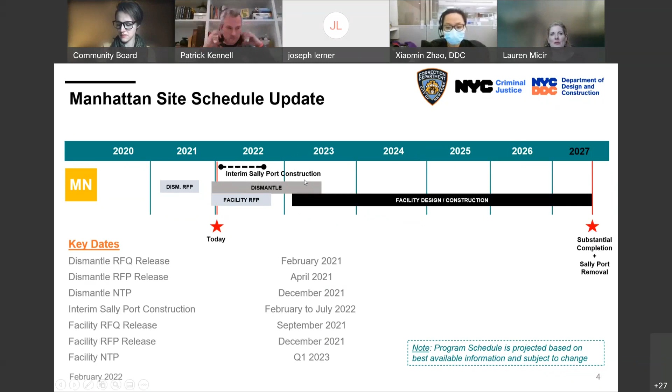I want to make it clear to everyone: the team here tonight is the design build team that has the contract for the interim Sallyport construction and the dismantle of the existing facility. A separate team will be onboarded in 2023 to do the design and construction of the new facility, which has not yet been designed. The interim Sallyport starting construction this month will finish construction by July 2022, but that facility will remain in place until substantial completion of the new facility in 2027, at which point the interim Sallyport will also be taken down and dismantled.

So during all of this, there are a variety of resources for the community. This is a quick snapshot of past engagement that we have done. Most recently, we did a couple of presentations in December of last year.

We presented to this committee and gave an initial presentation on the Sallyport design. We received a lot of feedback during that meeting, which was part of a preliminary PDC submission. PDC also heard about the community's feedback and responded back to our team asking for some design changes and updates.

So we are here tonight to show the community the revised design and what changes we have made in response to all of that feedback before resubmitting to PDC on the 18th of this month. We also presented about the artwork removal and storage and the Percent for Art program in December.

And then throughout January, as the design build team has kicked off, we've had a number of briefings, first with Councilmember Marte, also with the borough president, and then we were recently at the Quality of Life Committee to walk everyone through the full dismantle process and what to expect during dismantlement, in addition to some brief updates on the Sallyport. We also held a briefing with stakeholders in Chinatown on the 26th of January.

Upcoming meetings: we are going to be on the agenda for the CB1 Executive Committee on the 17th of February. That is in response to a number of questions we've received on some technical information and planning for dismantlement and environmental questions. That presentation is going to be focused on those environmental issues and the information we can share about those topics.

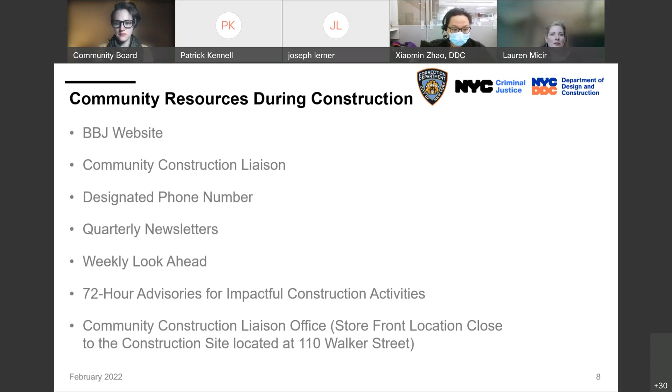She will have a storefront and office space located at 110 Walker Street, just a block from the site. We expect that to begin being open on the 15th of this month. There's a conference room that'll still be getting built out and will open another week or two after that, but we do expect her to be on site and available on the 15th.

This is a quick snapshot of our website. I mentioned there's a lot of information that the community can find here: updates on project timeline, all the notifications that we issue get posted here, and NAC presentations and other community engagement updates also get posted.

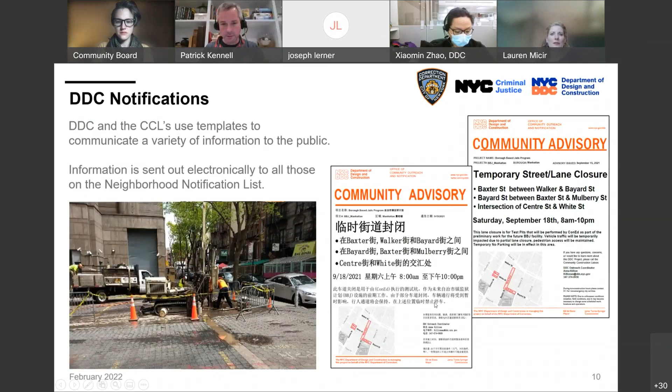This is a snapshot of those advisories that go out to the community in advance of impactful construction activities. These are the 72-hour notices that get posted.

And this is Pauline Chan. Some of you have already probably seen her and met her. She's been going around the neighborhood, sharing these advisories, sharing her project information card, and just getting to know the community. So she's a great resource for everybody.

And with that, I'm going to turn it over to Richard, I think you're going first, to give a quick overview about the overall dismantle process.

Hi, good evening everybody, how are you? My name is Rich Peterson. I am the project manager for the dismantlement design build, and I'll walk you through the dismantlement process that we're getting ready to get started.

So right now, we are in February. We are getting ready to set up for the interim Sallyport to start construction. We have been working inside of the building doing our site assessment and surveys for the past month in order to develop our dismantlement means and methods for the DOB.

About mid this month, we will be going on site to start setting up our construction fencing. We are setting up the field offices and we'll begin to have a presence on the site. By the end of the month, we hope to start the artwork removal and prep for storage. And then around May, you will start to see scaffolding be erected on the buildings and prep for full dismantlement come summertime.

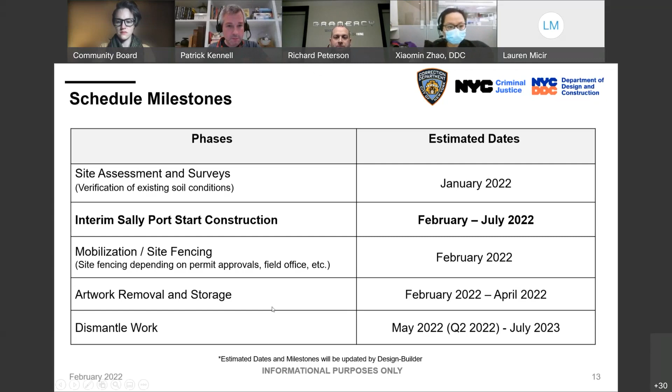And now I'll walk you through a quick animation showing the intended procedures that we plan to use to take down the two structures. So here we are looking southbound. You have Chung Pak to the north tower, and then the south tower.

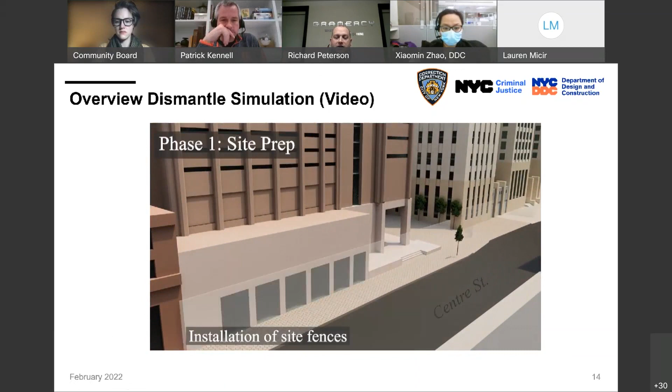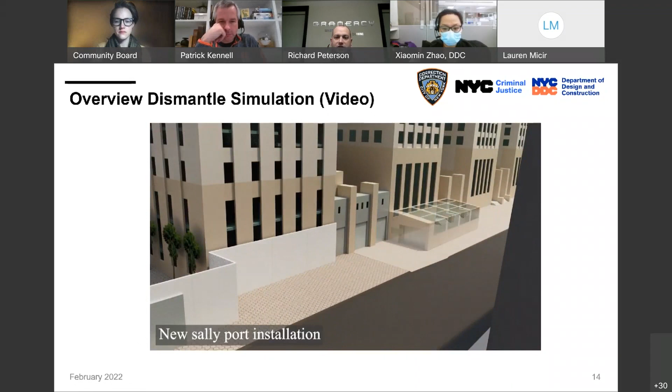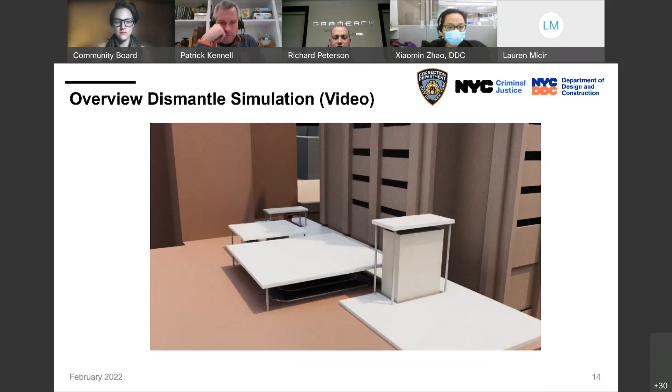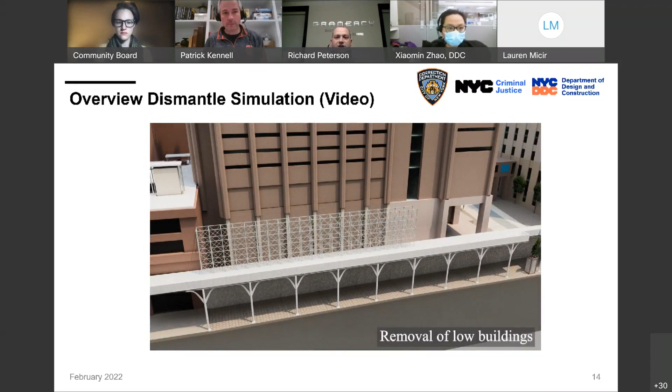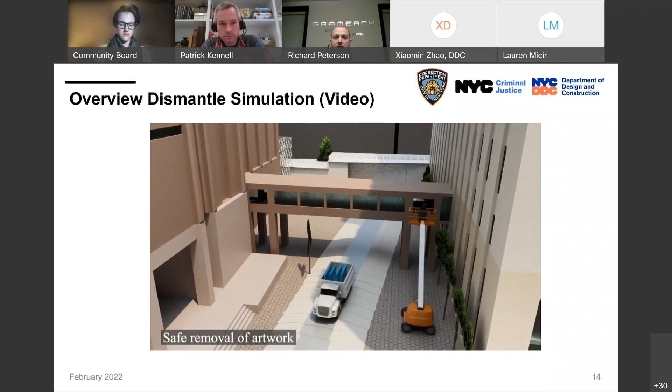You'll be installing roof protection over the Walker Street property, which is Chung Pak, over their skylights and rooftop equipment. Sidewalk bridging and scaffolding will be erected on the job site. As you can see here, the scaffold is not your typical sidewalk shed, it is the Urban Umbrella shedding, which allows for no cross bracing at the area of pedestrian traffic. So it's open, airy, and a brightly lit sidewalk shed.

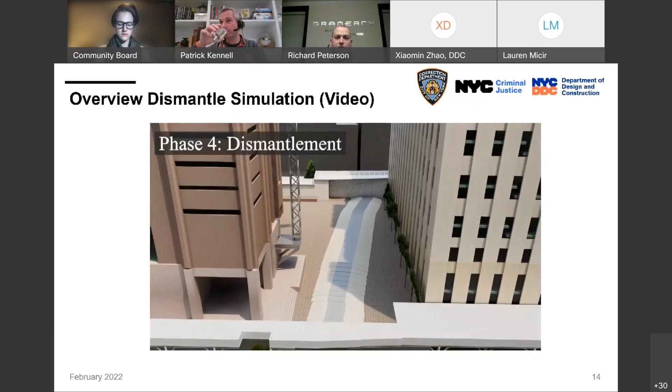Here you can see on White Street, once the site's enclosed, the artwork will be removed and salvaged, and the White Street Bridge and other miscellaneous removals will take place to open up a landing area on White Street for the project, a staging area if you will. A crane will be brought to the site. The exact crane is still under design, but it'll be installed in the White Street area and be able to pick and lower equipment, steel, and debris from the building.

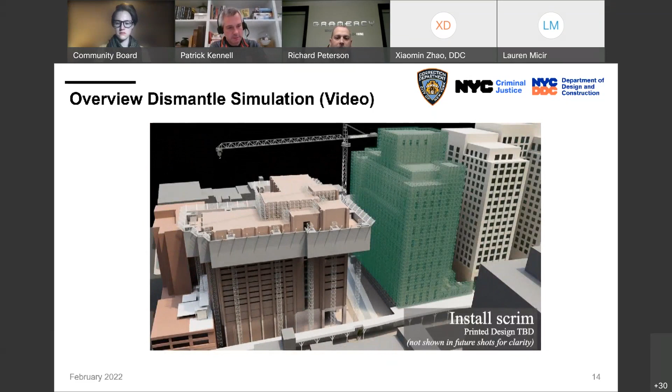The scaffold systems that we're using are unique to this project. They are being designed in order to contain noise, dust, and sound from the neighboring properties. So they will have sound-attenuating and dust blankets on them, and they will work to create a cocoon-like environment around the floors of dismantlement.

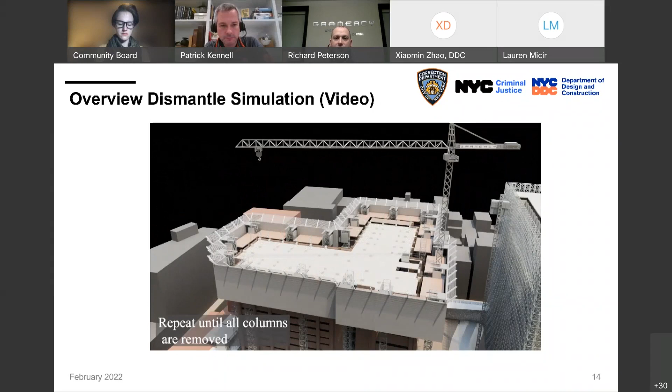The crane here you can see will be utilized to pick and lower the perimeter precast concrete panels. They will be lifted out of place and lowered down to White Street, and removed from the site. Various other parts of the building, such as concrete columns on the north tower, steel beams on the south tower, will also be picked and lowered via crane to the ground.

You will see that the equipment here works in a top-down fashion, so the floors will come down floor by floor, and the bridges that connect the south tower to the courthouse will be dismantled once we reach that level. The openings in the courthouse where the bridges connect will be sealed off with limestone from the south tower in order to match and appear fluid on the building, so that there was never a bridge connecting to it.

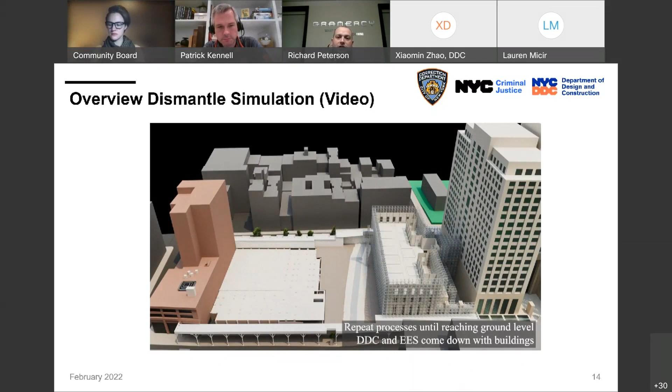This will continue floor by floor down to grade level, at which point the crane will no longer be needed and the floor slab on grade will be removed. White Street will remain intact. There is no excavation occurring. The tunnel that connects the two towers below White Street will remain. It'll be sealed off on either end and abandoned in place for future removal once the oilostatic line is no longer in service through White Street.

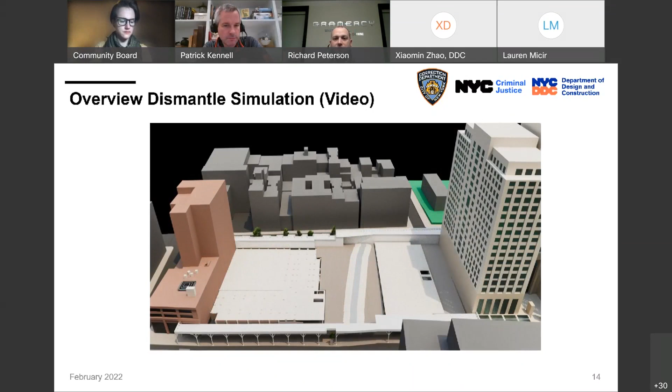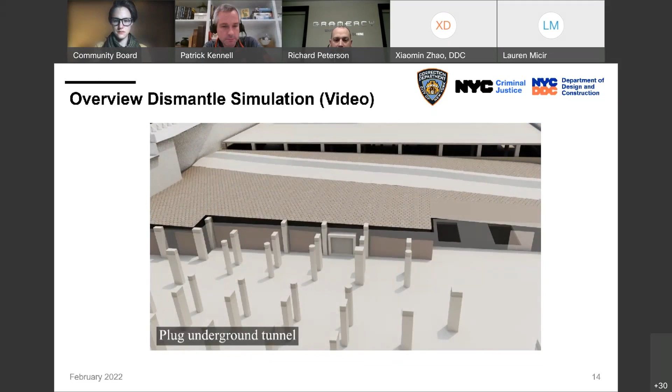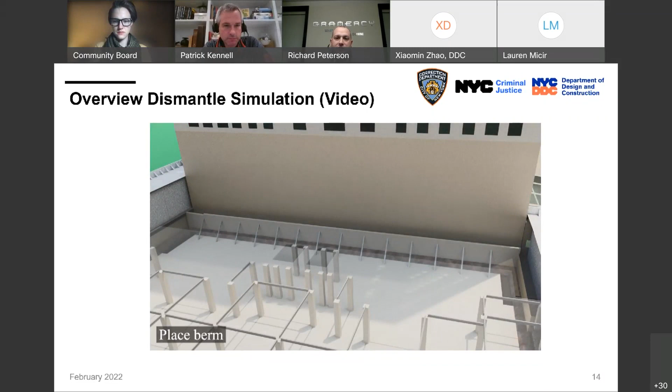The basement slabs will be fractured. This will allow for drainage, with no accumulation of water on the project site. As you can see, that's the tunnel I was just describing. The perimeters will be braced and shored as required in order to support the soil loads that will be used to fill in the project. And the site will be left flush to grade with no tripping hazards or any areas of flooding or depression.

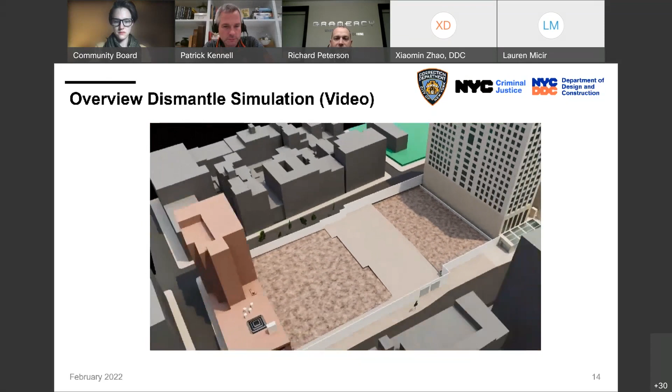Once the site's filled and leveled, the perimeter sidewalk sheds will be removed and the site will be left to be turned over to the next design-build contractor for the reconstruction.

And now I'll hand it over to Robert Young to discuss the Sallyport design updates.

Thanks very much, Richard. My name is Robert Young, and I'm with the Lero group as part of the team. Let's go to the first slide if we can.

Let's go to the next one, please.

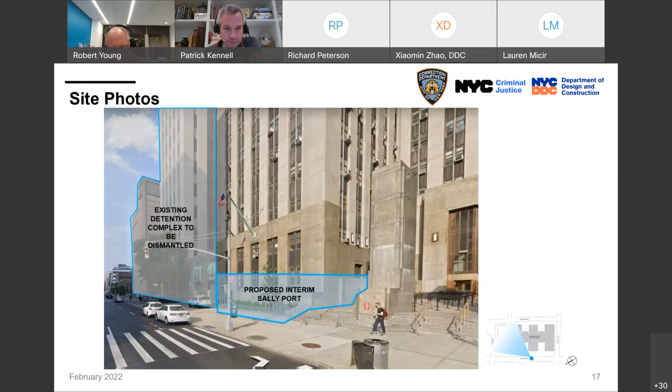This illustrates the area that we're talking about. You can see the complex to be dismantled to the north side of the site. And what we're trying to do is to squeeze this new Sallyport into the area as close as possible to

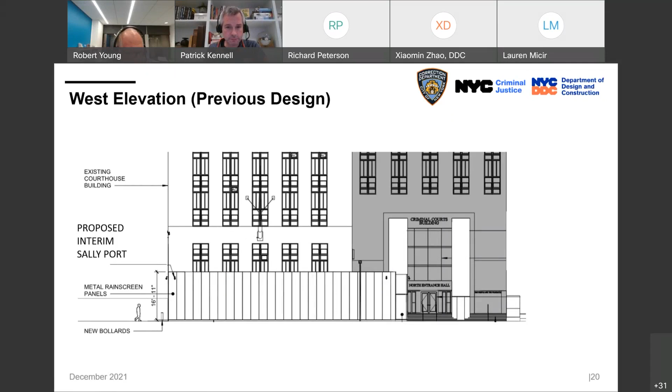So what we've done is we've worked within the DOC requirements for the clearances to get it as low as possible. We were able to drop the building by 1.5 feet from its pre-proposed height. In addition, we've brought in some clerestory lighting to allow some more light into the building, but as well to mitigate some of the scale issues of that previously nearly 17-foot tall wall. It's now at about 15.5 feet.

The third mitigation strategy here that you can see in this elevation is a zone below those windows that extends the entire length of that wall, which is an art strategy wall. So we'd be looking closely at ways to integrate some art into this public experience along that front edge.

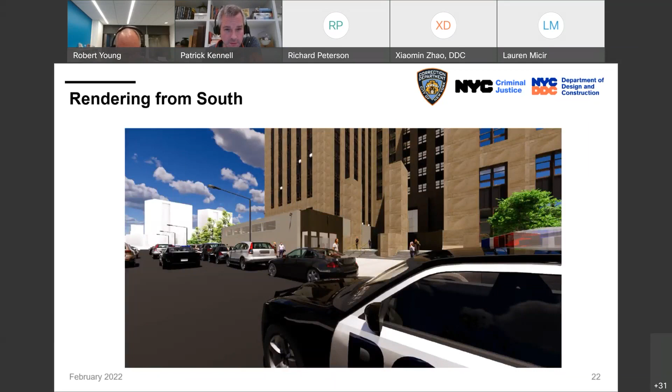Let's go to the next one, please. So this is a view showing those clerestory windows really being relatively effective at dropping down the mass of that, as well as the drop of the 1.5 feet from where it was. Next, please.

So from the side view, looking at the entrance into the sally port that the buses would take, you can see the proportion of the remaining sidewalk at 13.2 and that guard booth that provides 24-hour visibility onto the sidewalk at that point.

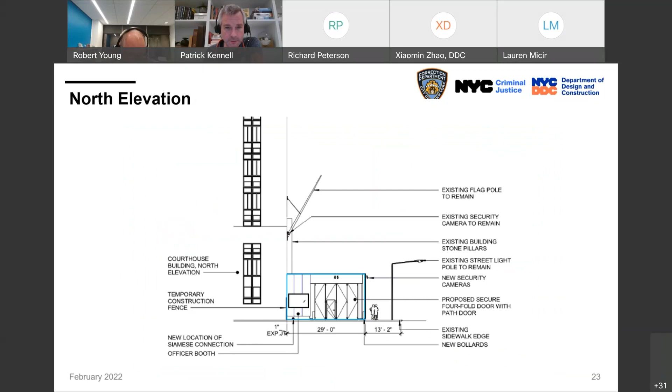This is a view of that end of the building. The materials in this building are chosen to highlight some of the shadows in the existing facilities so that we can mitigate the scale again as much as possible. It is by its nature a block of space that has quite difficult restrictions in terms of how it functions. So we're trying to apply some techniques to make it feel a little bit less massive.

The same condition will exist with the proposed interim sally port, where we're still using the same curb cut. We'll still use people that will be flagging. But in this case, what we're doing is pulling the buses under the sidewalk shed and behind some traffic dividers to provide some a real safety barrier for the public from that process.

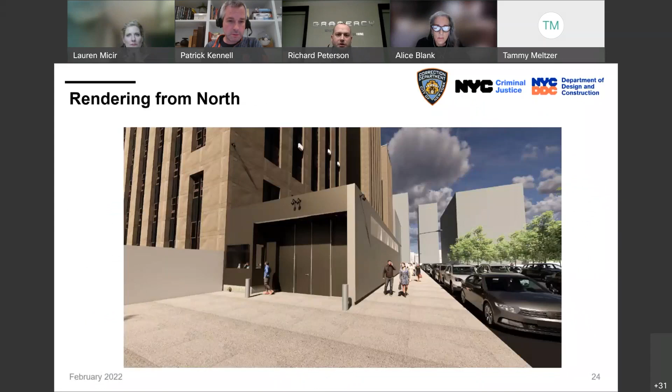Okay, so I guess, sorry to be unclear, so these are going to be steel panels in this infill. Is that what this gray or putty color is? Is that what that will be in that section of the entrance of the courthouse?

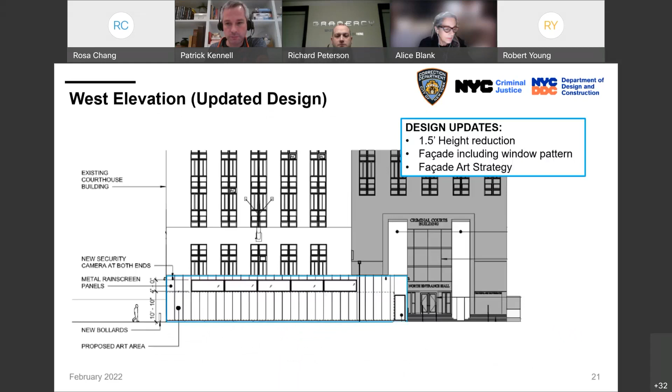Thank you very much, Patrick. I was wondering about Baxter Street. What is the intention in terms of street closures for Baxter? I know we saw the whole 3D animation regarding the sally port on the Center Street side, but what's proposed for Baxter? That wasn't shown in this presentation.

We've presented it in the past to a community board, not sure if it was this one. The Baxter Street sidewalk will be closed and the parking lane will be closed. Okay, and so pedestrians on the street, will the street remain open? Go ahead. The street will remain open. The only closure will be the parking lane.

Okay, and so will there also be a sally port on the Baxter Street side? So the current sally port has an entrance on Center Street and an exit on Baxter. The new sally port operates solely on Center. Okay, if that's the case, then why does Baxter Street need to have the parking lane and sidewalk closed? It's the safety influence line from the dismantlement. I see, so it's not necessarily related to the sally port itself? Not at all. Okay, and how many buses are there daily?

Is Sasha on? Yeah, I don't have that exact data, but I can get that to you. Hi, this is Mercy from DDC. I spoke with Nick Nelson from DOC, and he told me it's about 15.

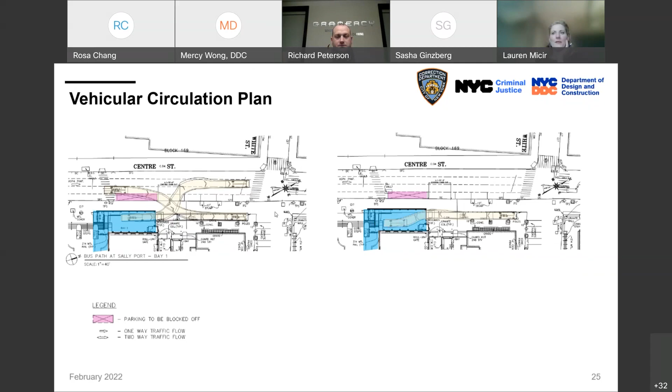I think what Richard was trying to show on the next slide, just as a quick comparison, is that this is where the buses are pulling in today. There's an existing curb cut here. In the proposed condition, those buses will be using the same curb cut and crossing over the sidewalk at the same point they do today.

So it's indicating that the sidewalk is going to basically be on the interior side of the sidewalk shed once it's gotten past the curb cut, correct? That's correct. It'll be closer to the tower than the curb.

Does this leave one lane on Centre Street open or two? All of the lanes. We are not closing any lanes on Centre, with the exception of the parking lane during construction of the Sally Port.

Which you can see indicated directly in front of the Sally Port, on the right-hand picture just right of the crosswalk. That area of parking will be closed in order to allow for the bus movements, and during construction it'll be closed for pedestrians to walk.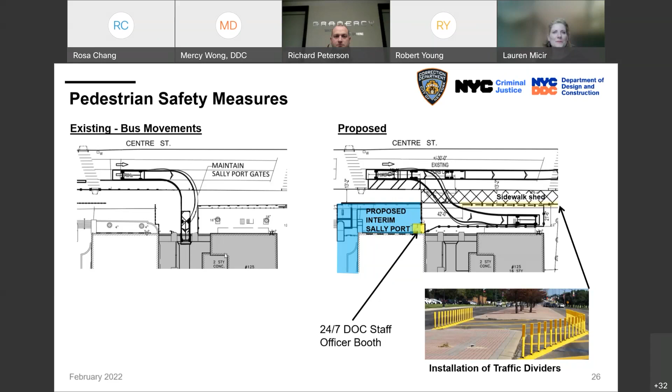I sort of feel for you, Robert, because you're being asked to defend something that, honestly, it sounds like you find difficult to defend. The reality is it's going to be on our streets for 5 to 7 or 8 years, so more thought has to go into the impact on a pedestrian and urban experience level. This is not good. This is not something I would personally want to walk across and experience every single day. I don't think it's subjective. I think we can all agree, even if you're designing it and you sound apologetic about it, that's not a good sign. This needs some work, and I'll leave it at that. Thank you.

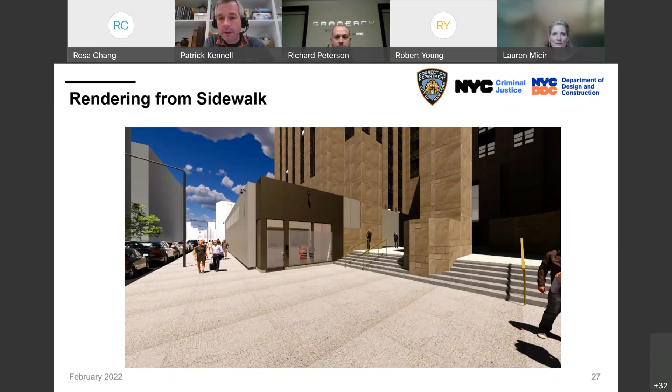I would like to know if the interior of the Sally Port is ADA accessible, because you said the detainees exited the bus and walked upstairs. What about if you're a disabled detainee? No, it is handicapped accessible. There's actually a ramp built to negotiate between the sidewalk level and the upper level of the courthouse entrance. Okay, thank you.

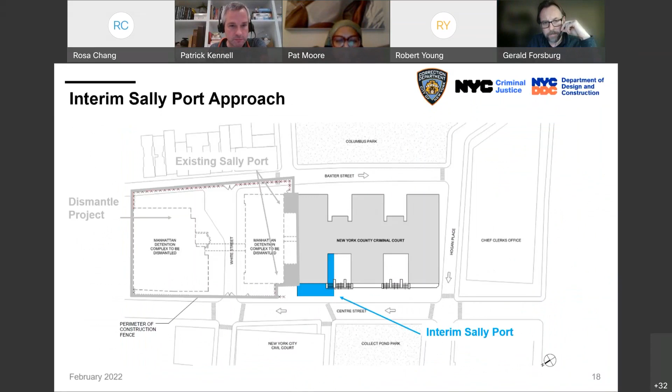Gerald: Pat, would you mind flipping to page 18, back a page? So maybe this has already been discussed, but it appears that along Baxter Street there's ample room to actually do a Sally Port maybe midway through the block and have it be drive-through rather than back in and back out, or back in and then go forward out. Why was Baxter Street ruled out? I haven't seen the interior floor plans, so I don't know the access, but those seem to be some very deep wells, and if I recall from walking through, there's ample space back there as opposed to taking over these front entries.

Richard: The interior configuration of the building is what leads to the use of the Centre Street side. Gerald: So is there access? I would imagine there's access from Baxter Street in these, what would you call them, deep wells? Is there access from Baxter Street to the interior of the building? Richard: There could be. The problem is you can't have circulation from the public inside the building crossing with prisoners or detainees. We have to maintain separation of those. The existing holding area is in such a location that we can either attach along the side of the existing building where it currently does, or use those double doors. Otherwise, there's a massive reconfiguration of flow within that space that would be prohibitive.

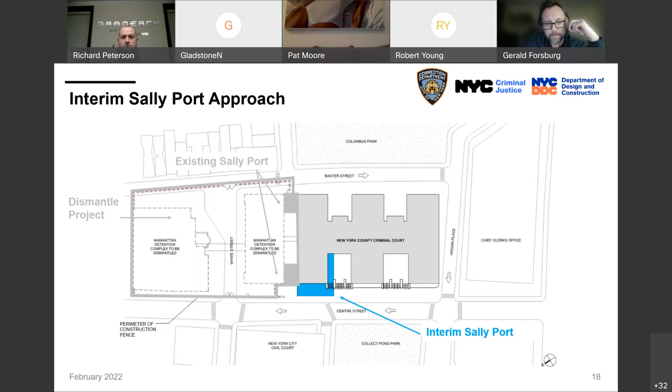Nina Gladstone, Project Management Consultant Group: There are actually courtrooms along Baxter Street, which is why detainees couldn't come in from that side. There are holding cells on the Centre Street side behind that blue area, and a secure corridor that leads to the holding cells for the detainees once they get inside the building. That's why that entrance was preferred for bringing detainees into the building. Gerald: I see, so the holding cell is this left-hand portion. Nina: Yeah, that's all DOC holding cell space along Centre Street, and then the control room. So it allows people in custody to walk securely through without entering any public spaces of the courthouse, then turn right into the holding area. The control room is in the middle of the plan, so they can walk by, get checked, and go through security.

Do you think that maybe between now and the executive committee, you could possibly show us the interior layout there? It's just so difficult to talk this through and visualize it without actually seeing the interior spaces and the circulation. Maybe some circulation paths would be helpful as well.

Yep, thanks, appreciate it. All right, Vera, I see you have your hand up for the first time, unless Tammy wants to go. Vera first. Okay, thanks, Tammy.

Thanks, Patrick. Question, you mentioned 15 buses daily will be coming. Can you tell me what times they are slated to come? I can, yes. So the vast majority of them go in the morning, in advance of a 9 a.m. court appearance. And then they would leave toward the end of the day, between 4 and 5 p.m. So that is where the peaks of the traffic flow are.

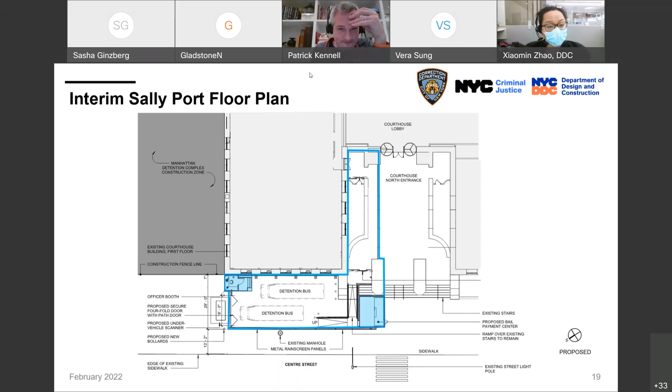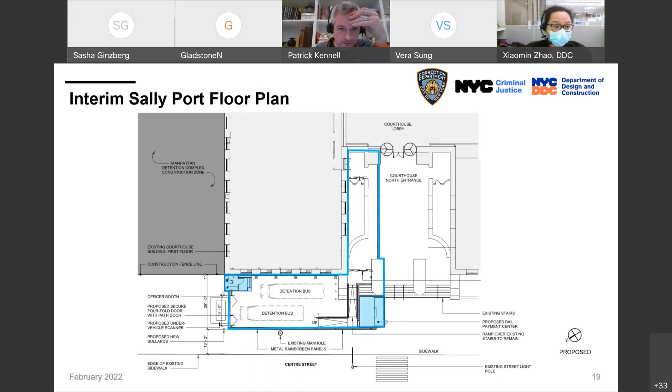Yes, we hold a meeting with Chinatown leaders. Usually they don't attend CB1 or they are not on the Manhattan NAC list, so we know a lot of them are missing from this discussion. So they are all on those lists, like CCBA, Lin Sing, all those family associations, business owners near the MDC sites. And we also invite business on Baxter Street to join.

Okay, if you could share with us the attendee list for that, and then what was the substance? Is there minutes of this meeting, Xiaomin, that you can share with us? We did the same. We shared the same presentation with CB1. It was the same presentation that was shown to the Quality of Life Committee. It included some Chinese translation of the text, but otherwise the content was the same.

Okay, so this does not constitute an NAC meeting, correct? That's not an NAC meeting. No. Okay, thanks, Patrick, that's it right for now.

We're not talking about the crane, right, Patrick, or anything like that right now? No. Okay, we're gonna vote on the Sally Port.

Well, I mean, Vera, if you have questions about that, we can get those out now, if it speeds it along. Yeah, it's just the first time I've heard about this crane, and I've obviously had concerns. Did not know when it's going to be put up and how long it's going to be there, and where is it, when it's parked over, which area it hangs over. Concerns about weather and all that stuff, because we've had cranes that have fallen down before and have killed people actually. So I have all those concerns and questions, which I'm not sure they want to answer now, Patrick, or later on, but lots of questions.

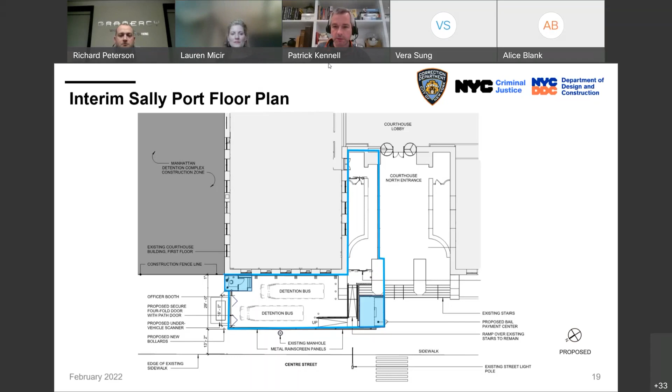Could you go to page 16? I just want to better understand. I think Gerald was getting at something I've often had the same problem with. I'd like to understand what is prohibiting us from using any of the existing condition access. Maybe you could just describe that with that particular slide.

The existing Sally Port is part of the dismantlement zone. There is a basement underneath it that needs to be removed and replaced. So the existing Sally Port location cannot be reused during the dismantlement and further reconstruction. As discussed, the interior layout of the courthouse does not permit entrances on Baxter for the transfer of persons in custody, whereas Centre Street is the location that allows for that to occur. But up until a few months ago, I guess that was the access point, not into the courthouse at that level, only through the basement?

No, so I don't have mouse control. If you go to the center of the existing Sally Port, Lauren, there is a door entrance and exit into the north end of the courthouse. So they're currently transferring from within. That now is part of the dismantlement zone as the existing Sally Port is being dismantled.

Well, I guess I'm sort of with Gerald on this, and with Rosa Chang. I think the one being built is really an insult to a tremendously injurious situation, where the very beautiful building that is a state and city landmark-eligible building is already coming down, but we should in addition put this really, frankly, ugly wart in front of it. I don't understand, I appreciate that in your mind you have to get the basement demolished, but there are alternatives. I don't understand why this side space that's completely available, and in fact already used for this very use, can't be considered again as an alternative rather than putting this in the front. I still don't understand it.

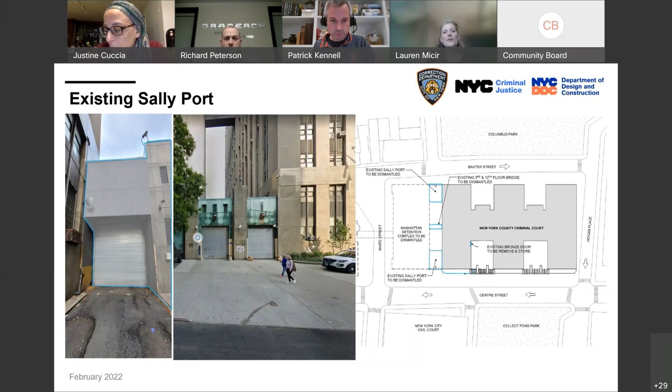Correct, that request is not coming from the city of New York, and so that is something that Mr. Cuccia will need to discuss with Charlie, with his landlord. Okay, thank you for that, because that's clear.

The second thing is the transparency, and everyone else has spoken to it so I'm not going to go on with it. But you're not engaging with the community, and I understand you guys have been on for 5 weeks only, but how is this still under deliberations and design planning, but you're going to start the Sally Port sooner than the design is planned? I don't understand this.

So there is removal work. We have to salvage the granite pavers so that they can be reinstalled. We have probes to do in the sidewalk to access the existing utility lines and subway to ensure that we are designing it to be placed in areas that do not interfere with these items. This is all work that needs to take place as part of the design work.

Yes, but all that work is going to disrupt the traffic and disrupt the neighborhood, and that has not been taken into account as part of your demolition at this point in time. That's what's outrageous here, and that's what the community is getting so angry about. Thank you.

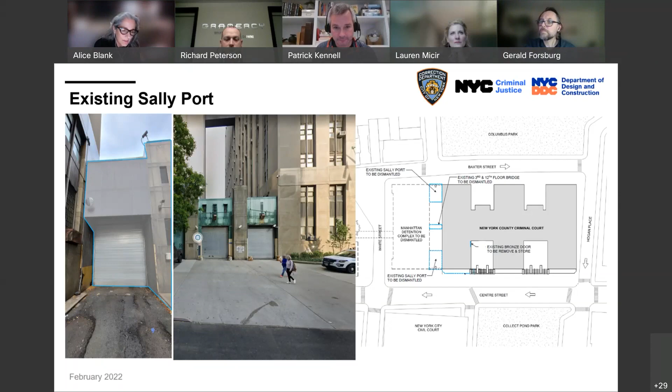So, out. I think it's unquestionable, and it's very much in keeping with the resolution we wrote last week, no to the jail, and a pause for us to carefully review where we're at with the new administration and the pandemic. But there is very little question that no one really understands the point of dismantling both these buildings.

We've never seen what might happen if you were to have kept 124 White Street and brought down 125 White Street, and how that might be an alternative we want to look at. We need to see alternatives.

So I just don't think we're at all convinced this Sally Port needs to be demolished, and two, that the one they're proposing is at the right place and has enough information about it. I mean, ugly - well, that's another point. But I just think it's clearly not there yet, and it should be in keeping with our earlier resolution. We need to take a pause and have a chance to review the alternatives and better understand why this is the only opportunity for this community.

Okay, thanks, Alice. Rosa, then Vicky. Thank you very much, Patrick. I just wanted to raise an alarm for everybody here.

I don't know if you've been following what we've been seeing at the environmental protection meetings or the waterfront meetings, but just so everybody understands, we have really, really little public open space downtown in our community. And what we actually have is along our entire perimeter. Starting already with the East Side Coastal Resiliency Project, and then going on with the other four projects, all of varying timelines but all pretty much starting this year, we are looking at park closures of pretty much every single park that we have downtown.